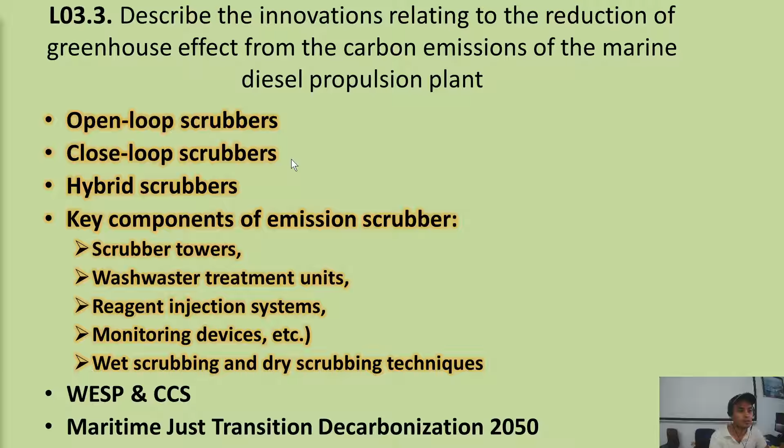So this will be our learning outcome: describe the innovations relating to the reduction of greenhouse effect from the carbon emissions of the marine diesel propulsion plant. So we will be discussing scrubbers, WESP, CCS, and Maritime Just Transition Decarbonization 2050, and other innovations relating to the reduction of greenhouse effect.

Okay, let's start. Keep calm, engineers will save the world. Are you superheroes? Maybe.

Recap on our previous discussion: we discussed energy and efficiency innovations for diesel engines. So we will be focusing more on the exhaust system and the fuel system.

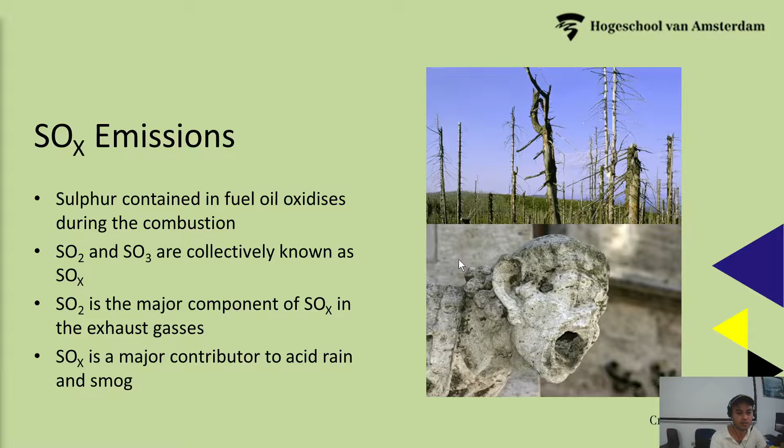SOx emissions: sulfur contained in fuel oil oxidizes during combustion. This is the effect of sulfur emission. SO2 or SO3 are collectively known as SOx. Sulfur dioxide is the major component of SOx in the exhaust gases. SOx is a major contributor to acid rain and smog. This is the effect of the acid rain.

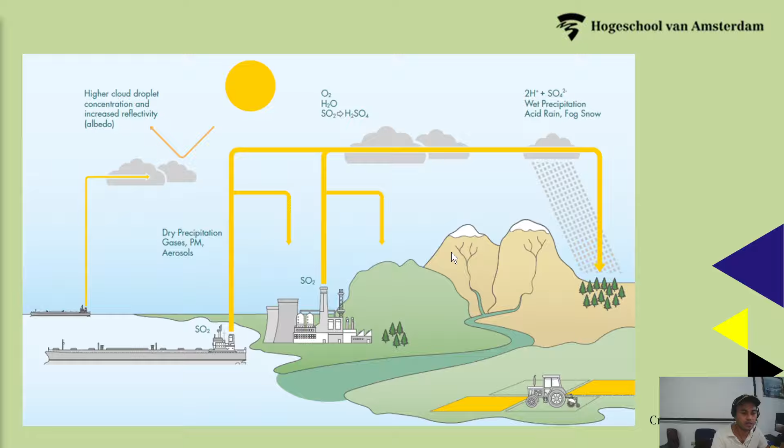So our ships have emissions, and these emissions create this reaction: oxygen gas plus water plus sulfur dioxide equals sulfuric acid. These sulfuric acids can affect our plants, our environment, our crops—there are many effects. So SOx is another one of the problems from our emissions.

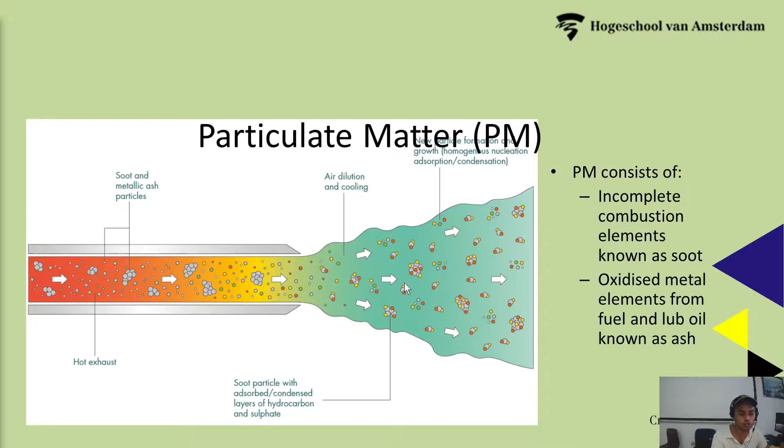This is the chemical itself. And another one we have is carbon, or black carbon, which is a form of ultrafine particulate matter.

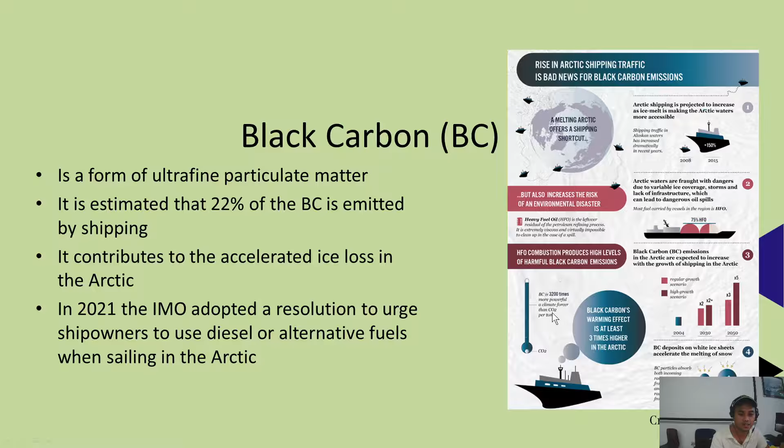Black carbon's warming effect is at least 3 times higher in the Arctic Ocean. Black carbon is 3,200 times more powerful a climate forcer than carbon dioxide per ton.

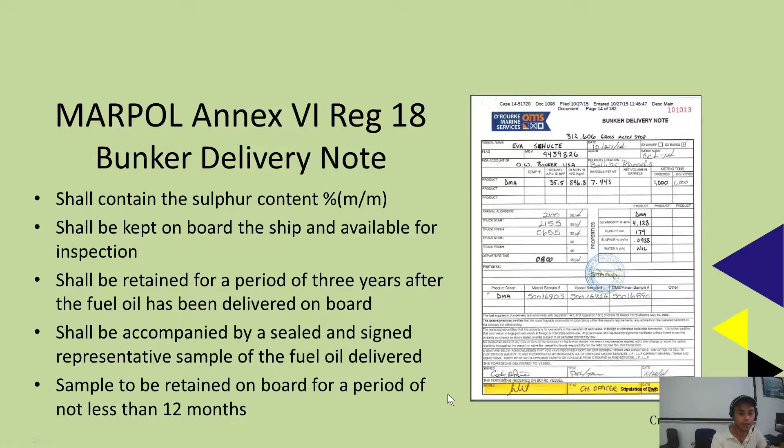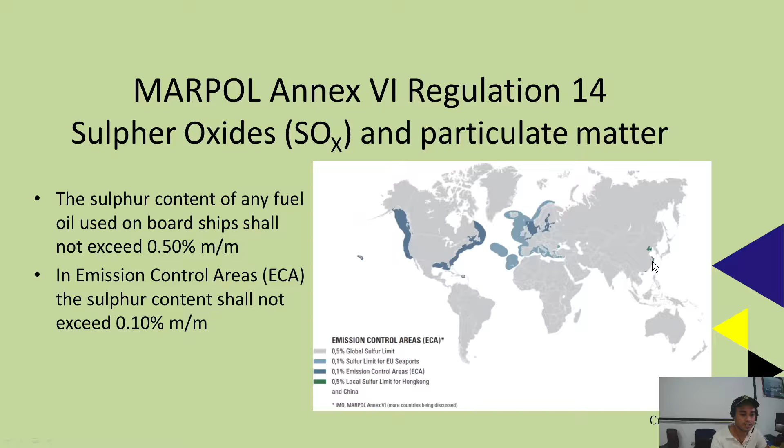So these are the ECA areas. We have them in the EU, Hong Kong and China, and also in America—they have ECA areas there.

Regulation 14.6, changeover procedure when entering or leaving SECA areas: in case a vessel has different fuel oils to comply with emission standards, there shall be written procedures on how fuel oil changeover should be carried out. The changeover should allow sufficient time for the fuel oil service system to be fully flushed before entering SECA. So if you will be entering a SECA area, 1 to 2 hours before, you must start changing your fuel to be compliant with the SOx regulation in that SECA area.

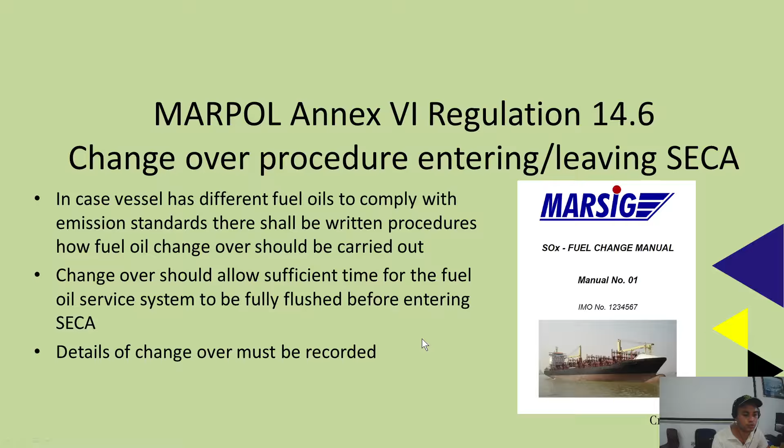Details of the changeover must be recorded, so you should have a record of it because the inspectors will look for it. We have the Marine Fuel Sulfur Record Book.

So you put the SECA area, like for example North Sea, date and time of entry into SECA, date and time changeover completed, position of ship at which changeover is completed. So you will call the bridge for the latitude and longitude of the position, volume of low sulfur fuel remaining per tank, and the signature of the chief engineer and signature of the master with the date.

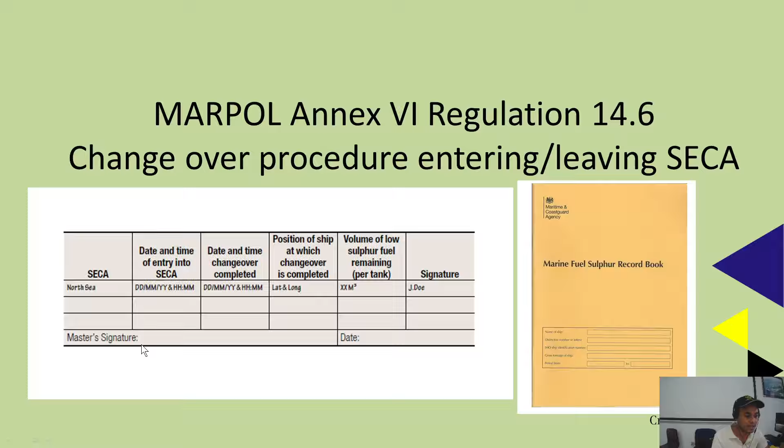So fuel oil tank management. SOLAS chapter 2-1 regulation 26 paragraph 11 requires that for each fuel type there shall be 2 service tanks with a capacity of at least 8 hours for operating main engine at maximum continuous rating and normal electric load at sea. These are for ships constructed since 1st July 1998.

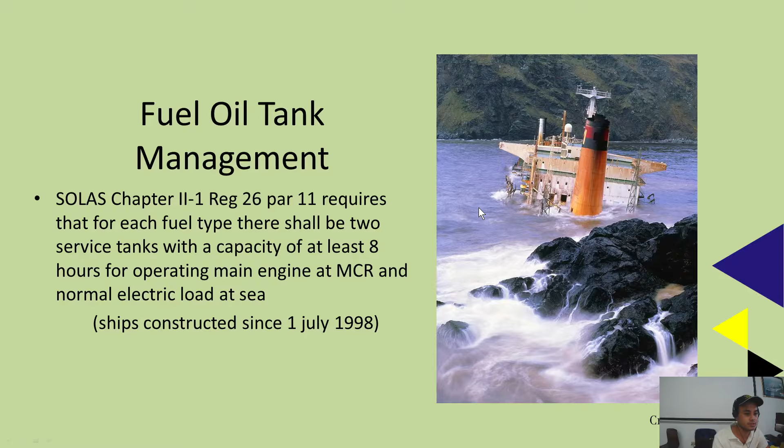So 2 different service tanks for different types of fuel. For example, we have here HFO service tank 1, capacity at least 8 hours, service tank 2, and diesel oil tank. Or you have HFO service tank and MDO service tank. This MDO you will be using on SECA areas.

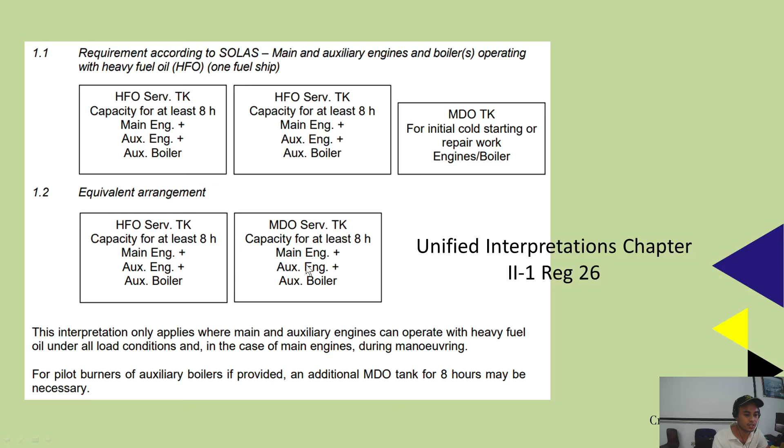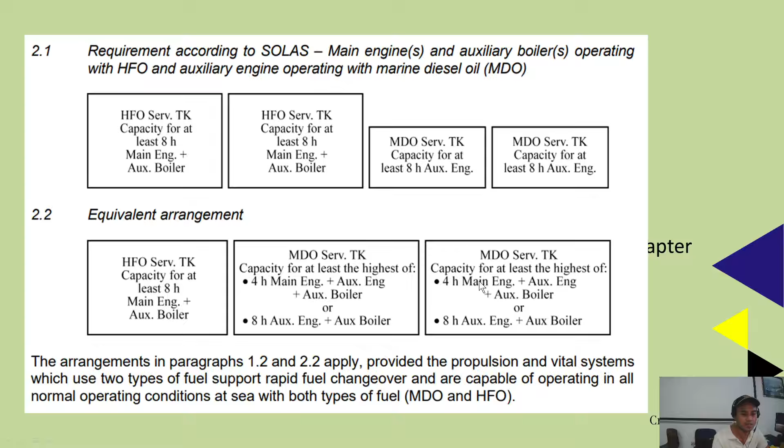Another configuration: 2 types of HFO, 2 types of DO service tank, or 1 HFO, 1 MD, and 2 diesel oil service tank. Then if you total this DO service tank, 4 hours plus 4 hours equals to 8 hours. Or you can do minimum 8 hours both, so you can also do 8 hours each tank. So this is another.

We have HFO bunker tank, DO bunker tank, and gas oil bunker tank. So 3 different bunker tanks for 3 different types of fuel. We have to transfer it to a settling tank. So separate settling tanks for different types of fuel, and then purifier for different types of fuel, and a service tank, 1 or 2.

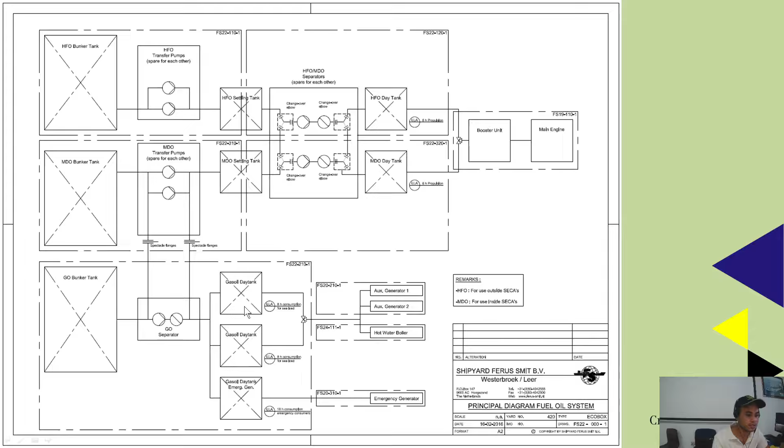Let's say 8 hours of use. Usually the gas oil day tank is already clean, so they don't usually put it on a settling tank anymore. So you can also use this.

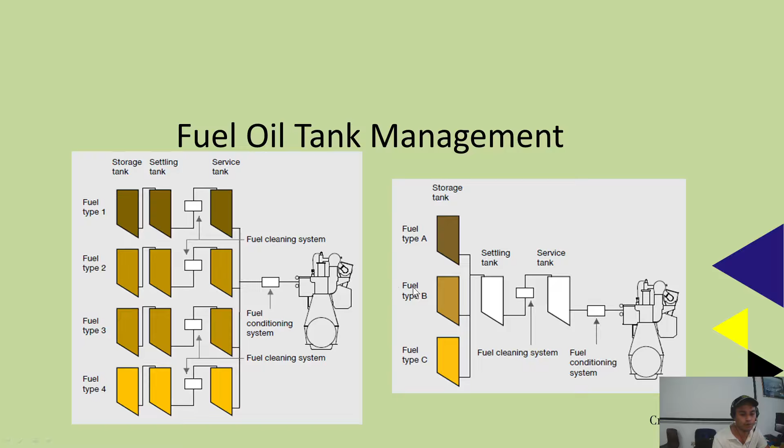Or you can have this one, fuel type A, B, C, but this is not really used on board. We usually have separate settling tanks for different types of fuel, especially if you have HFO and other much cleaner oil. You cannot mix them. Okay, changeover procedure.

So depending on fuel oil tank management, calculation needs to be made for time needed to complete changeover procedure. For example, if you have the version 3.0, if you have HFO in the settling tank at start of changeover, 0 tons, start change of 10 tons, so you will have rate of fuel consumption of 1.33 tons per hour. You will have to click on the yellow box and select required sulfur, it's 1.5.

Changeover time for compliance is 22.4 hours. So this will be your changeover time for compliance. 22 hours before entering a SECA area, or this is just an example, 22.4 hours before entering the SECA areas. So you should be done changing over your fuel.

So depending on fuel oil tank management, calculation needs to be made for time needed to complete changeover procedure. If settling and day tank needs to be cleaned, this may take days. Drain settling tank and fill up with LSFO and let it rest for 2 days before operating purifier. Flow-through method may be used to clean day tank. Pump 3 times the capacity of LSFO into a day tank to get exchange rate with HSFO of more than 95%.

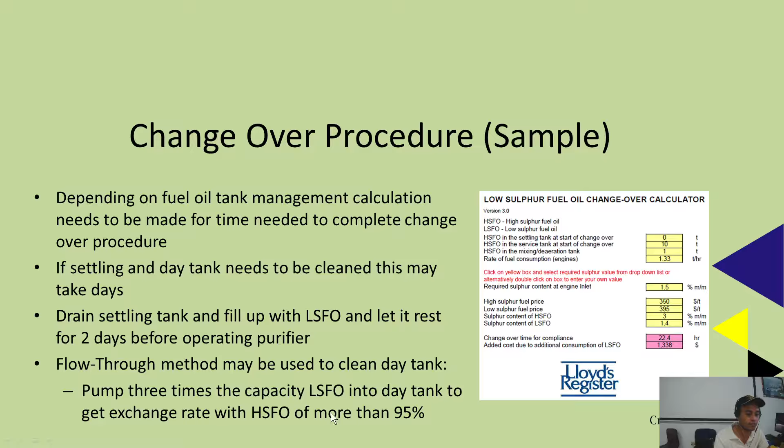Changeover procedure: changeover from high viscosity fuel to low viscosity fuel means lowering the temperature. So injection equipment needs protection against rapid temperature changes to avoid gassing of fuel, which may cause loss of power. We have discussed this one, that if there is air or gas that enters into our fuel injection system, since air is compressible, our injection might not be activated anymore because of the gas, and it may cause loss of power or stopping of the engine.

The changeover should be carried out at low load, 25 to 40% of the maximum continuous rating. The fuel temperature gradient should not exceed 2 degrees Celsius per minute. So if you have from 125 degrees Celsius down to 30, or let's say 25 degrees Celsius, so you have 100 degrees Celsius difference.

That 100 degrees Celsius, changeover procedure for that is minimum 50 minutes. But usually it takes an hour or more to change over from HFO to a lower viscosity or to diesel oil, for example.

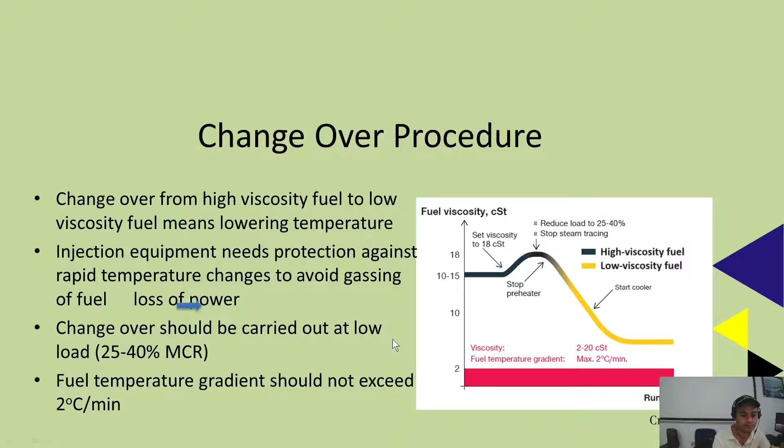So changeover from low viscosity fuel to high viscosity fuel means increasing the temperature. If you change from low viscosity to high viscosity, you have to increase temperature.

Extra care should be taken as warm fuel will flow to cold components. The material will expand slightly. The fuel pump plunger will warm up first as the barrel contains more material. With decrease in clearance, the risk of seizure increases.

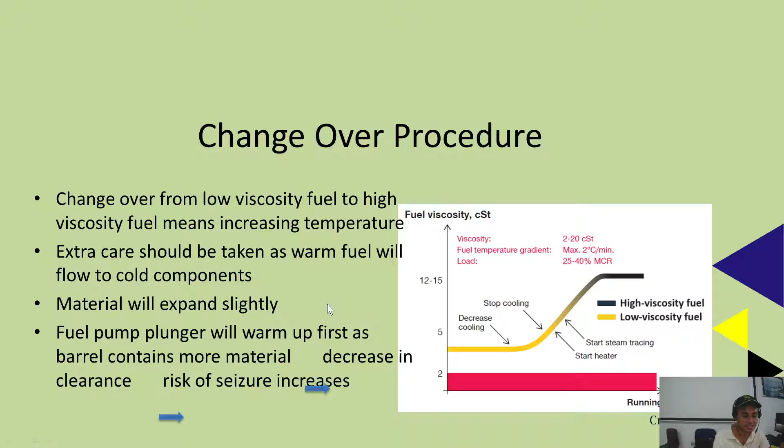When we usually change over from low temperature fuel to high temperature fuel, if you don't change over gradually, there will be a sudden temperature rise, and then the material will expand, and leakages will happen into the pumps, fuel pumps, and other connections, or if there are gaskets, there will be leakages. So be careful.

Okay, HFO MDO changing valves we have here. This is an automatic changing valve. This one is the HFO and the MDO. So if you activate this one, you put air in this valve control box, air pressure 6 bar, so this valve will move the two valves. It will change valve 1 from DO to HFO, and this will be the inlet to the engine.

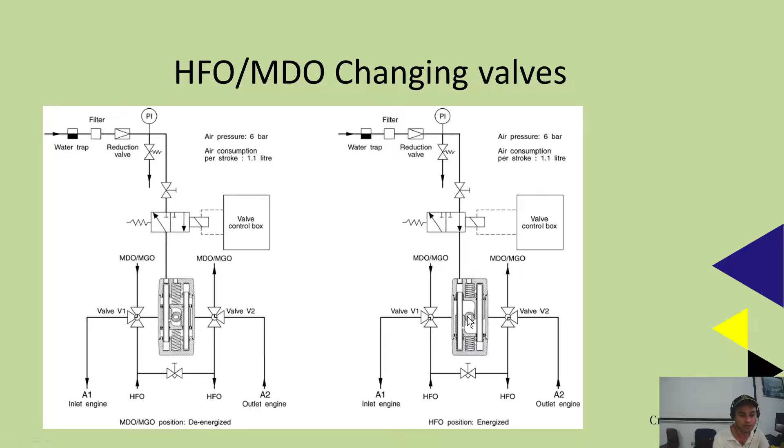So you can use, if you have two engines, like the main engine, the inlet and the outlet will both be activated in changing over. It's not possible that you have HFO inlet and then the outlet will be DO, because your HFO will contaminate the DO tank. But from DO to HFO, it doesn't hurt much, though diesel oil is much more expensive than HFO, so price will matter also. This is automatic changeover, and usually they make the changeover take about an hour, or depending on the program, depending on how long it takes to change over from one fuel to another.

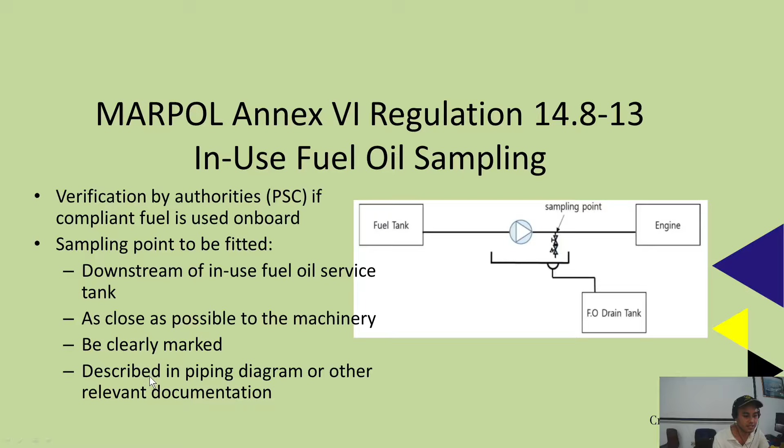MARPOL Annex 6 Regulation 14.8 to 13, in-use fuel oil sampling. We have the fuel tank, fuel sampling point here, and going to the engine. If you want a sample of your fuel going to the engine, you can get a sample from here, for verification by authorities if compliant fuel is used on board. So the authorities can get a sample here. The sampling point is to be fitted downstream of the in-use fuel oil service tank, as close as possible to the machinery, clearly marked and described in the piping diagram or other relevant documentation.

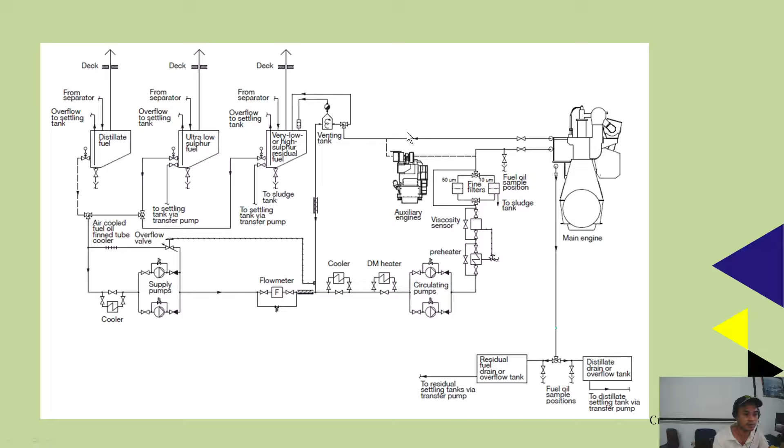So here we have the engine, and here the sample fuel oil sample points. You can get a sample for the residual fuel or the distillate, the cleaner fuel. Residual is more on the HFO side. So from the tank, service tank, to a supply pump, circulating pump, going to the engine. Also we have the generator, again getting back to the venting tank or mixing tank with the recirculation, the recirculating pumps.

MARPOL Annex 6 Regulation 4, equivalence: ships may be fitted with equipment, alternative fuels, or compliance methods used as an alternative, which are at least as effective in terms of emission reduction as required by Annex 6, including Regulation 13 and 14.

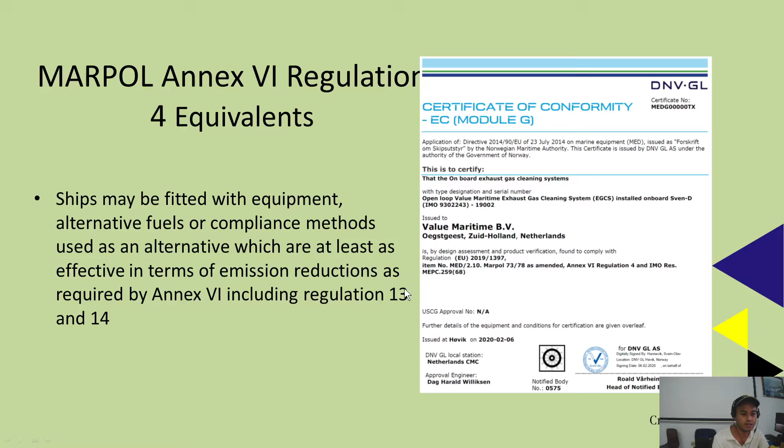So here they have an open loop exhaust gas cleaning system. This might be a scrubber, an open loop scrubber. Exhaust gas cleaning systems convert from sulfur content fuel to SOx emissions in exhaust gases. SOx emissions are derived from the sulfur content of the fuel, similar to carbon dioxide emissions. The SOx to CO2 ratio gives a clear measure of the sulfur content of the fuel.

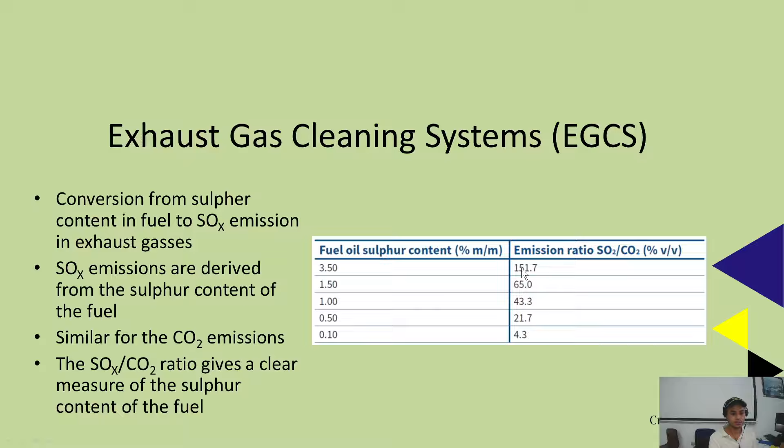So treatment processes for SOx: systems can be divided into wet exhaust gas cleaning systems or dry exhaust gas cleaning systems. For the wet exhaust gas cleaning system, we have the open loop scrubber, closed loop scrubber, and hybrid scrubber, which is a combination of the two. We'll discuss these one by one. And we have the dry exhaust gas cleaning system, another alternative, which is not usually commonly used on ships.

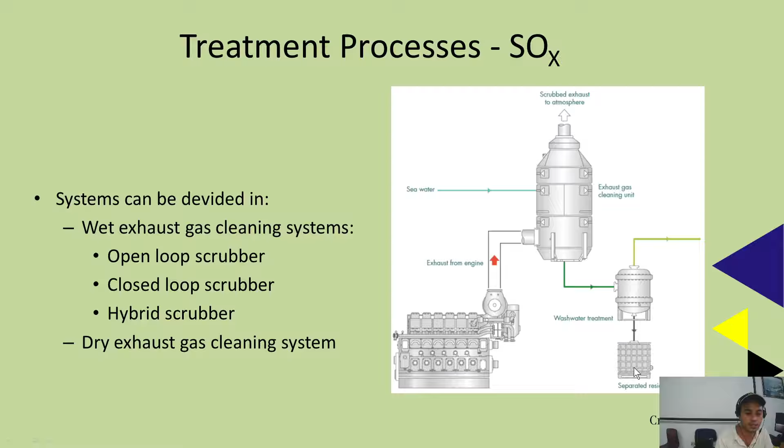So this is the scrubber system. Exhaust from the engine goes through a scrubber, and when the smoke goes up, there is a shower-like exhaust gas cleaning unit here. Seawater is showered in here, and then the wash water goes to a wash water treatment, where you separate the residue, and then the seawater can be put back to the sea.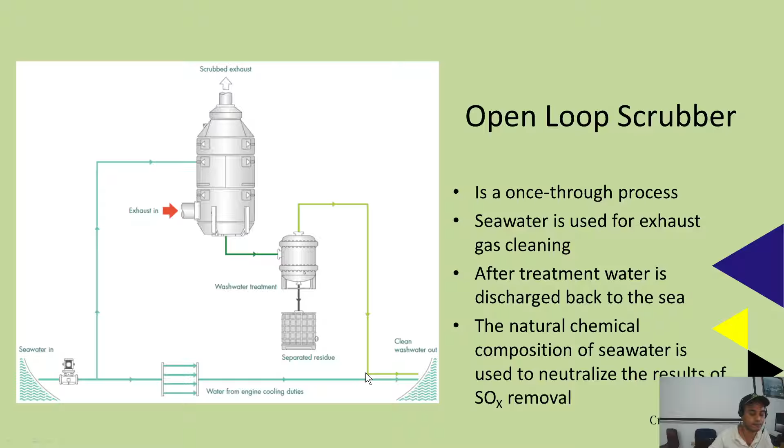Also, you can use another seawater line for engine cooling duties if you use seawater. But some ships usually use fresh water. So this is the open loop scrubber.

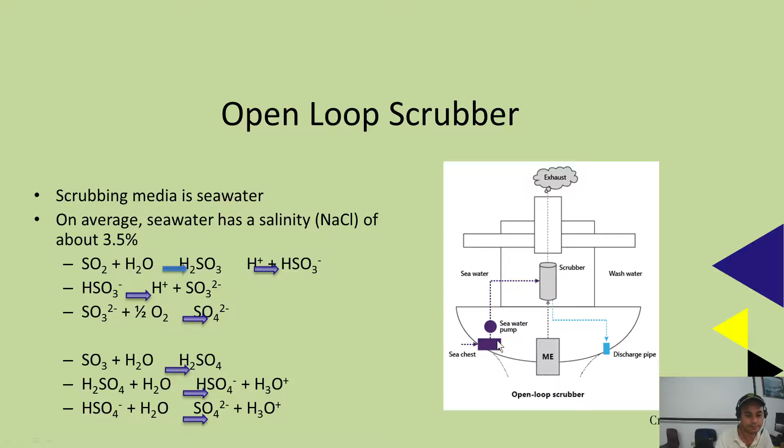Scrubbing media is seawater. On average, seawater has a salinity of about 3.5%. The combination of sulfur dioxide plus H2O equals H2SO3, which becomes H plus HSO3 minus. Usually you have sulfuric acid, which leaches in the scrubber and then goes to the discharge pipe.

Okay, how about for the closed loop scrubber? For the closed loop scrubber, fresh water treated with an alkaline chemical, sodium hydroxide, is used for exhaust gas cleaning. The majority of wash water is recirculated, and a small quantity of wash water is bled off to a treatment plant before discharge to the sea.

So let's go through how this works. We have here a pump, and the process tank, in which you get the fresh water. Then we have a chemical dosing pump that adds chemical to the fresh water. It goes to a cooler since the water in here is slightly hot.

It's pumped up to the scrubber and sprayed on top of the scrubber, then exhaust gas comes in and scrubbed exhaust gas goes out. Then the processed water goes to a process tank, and then you clean it.

The clean water you can recirculate and use back in the scrubber, and the dirty one goes to a separator or purifier, whatever they usually use. The residue will go to a tank, while the fresh water or clean water will go to a holding tank.

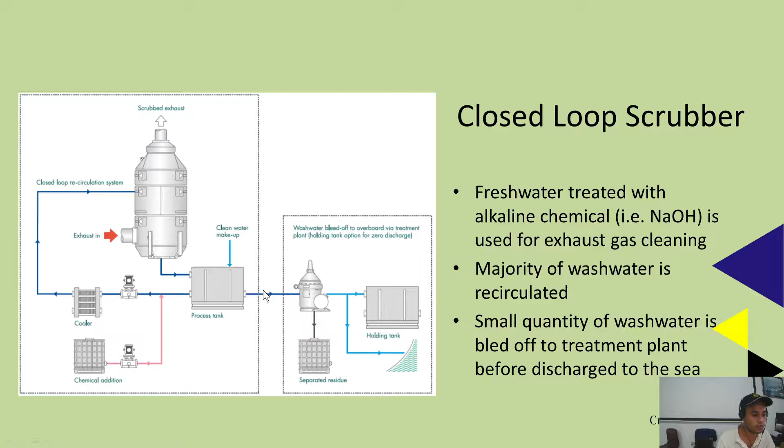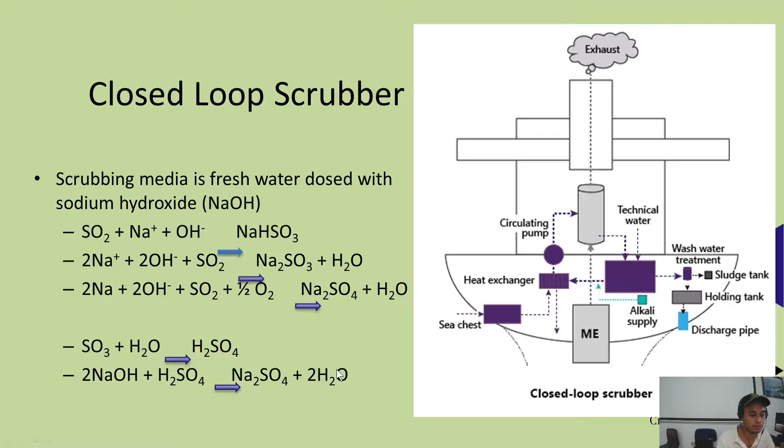We use this chemical addition to neutralize the acidity of the processed water, using sodium hydroxide. In theory, in the chemical process, we have SO2 plus sodium plus OH, because this is from sodium hydroxide, and then you get the output product, sodium... whatever it's called. Then you have the sodium sulfate and water as the result.

So for the hybrid scrubber, we have the combination of both open loop operation and closed loop operation. If you want to use open loop operation when you are at sea, you can have the open loop suction of seawater going to the scrubber and out to the sea. Then if you are in near coastal areas or shore, or going through ports, you can change over.

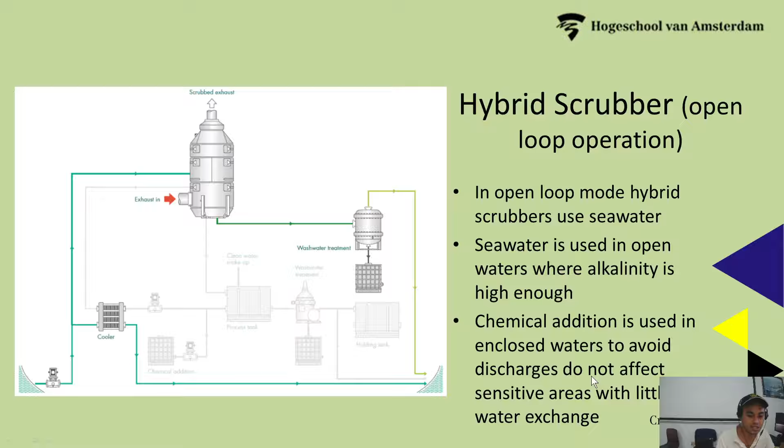Seawater is used in open waters where alkalinity is high enough. Chemical addition is used in enclosed waters to avoid discharges affecting sensitive areas with little water exchange.

If you want to use the closed loop operation, you can still use seawater to cool the cooler and then go back overboard. Meanwhile, there is fresh water, processed water with chemical, going to the scrubber and returning to the process with a separator and a holding tank. So this is the combination of the two, the hybrid scrubber.

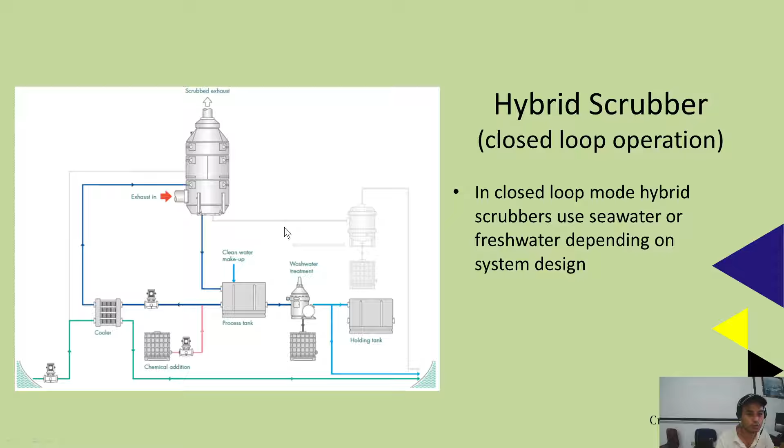In closed loop mode, hybrid scrubbers use seawater or fresh water depending on system design. So this is the hybrid scrubber - this is suction going up here and the cooler, and then going to the scrubber, and then the scrubber output goes back.

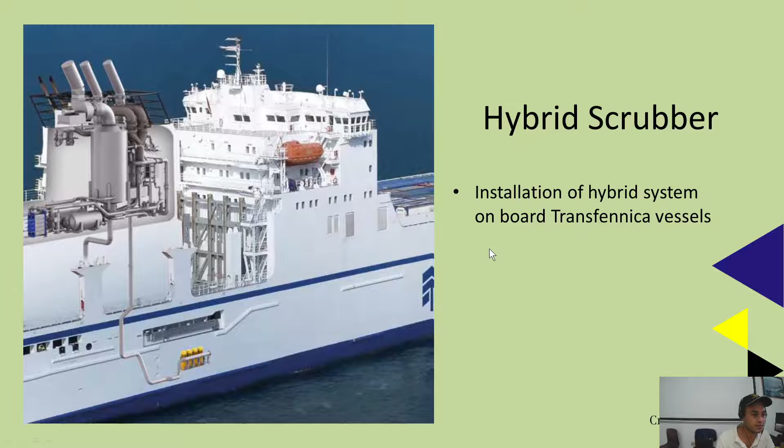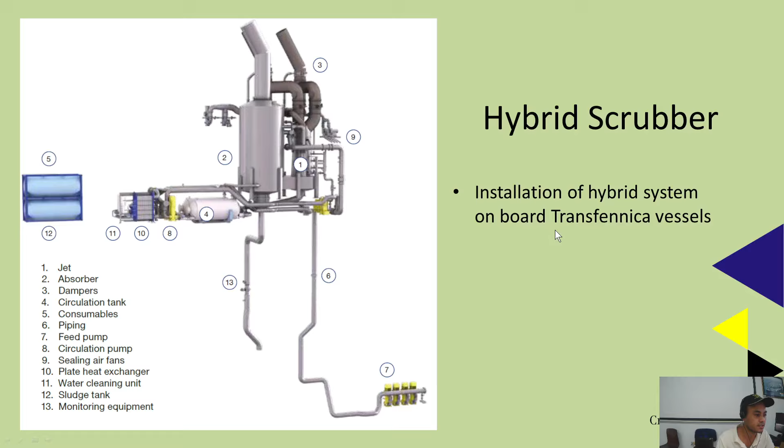Okay, so this is the Transfennica. They've used an installed scrubber in this case. So coming to this one, you can look for a scrubber system from Alfa Laval online video.

So let's talk about wash water. Most exhaust gas cleaning systems use water to remove SOx and particulate matters from the exhaust gases. So wash water should be monitored in the following parameters.

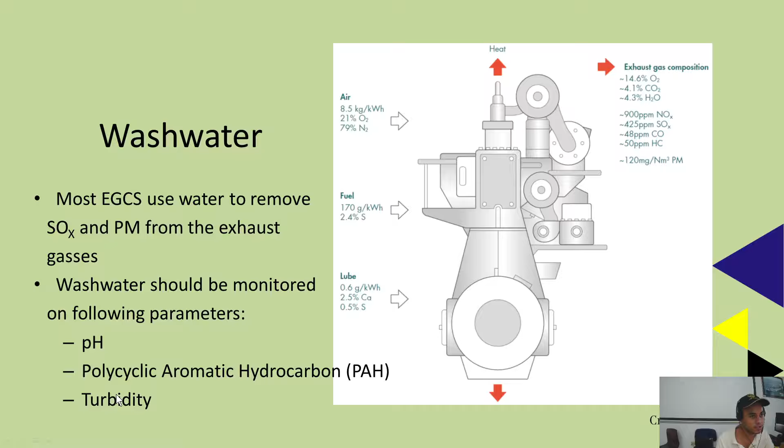So we should check the pH. It should not be too acidic for the seawater, if you want to pump it out to the sea. Polycyclic aromatic hydrocarbon, and the turbidity. It should not be turbid, it should not be dirty water. It should be clear.

Okay, monitoring instrumentation. So we have here the monitoring instrumentation: pH, PAH, and turbidity, salinity optional. You can put it here, 1, 2, and 3, and then another for number 4 here.

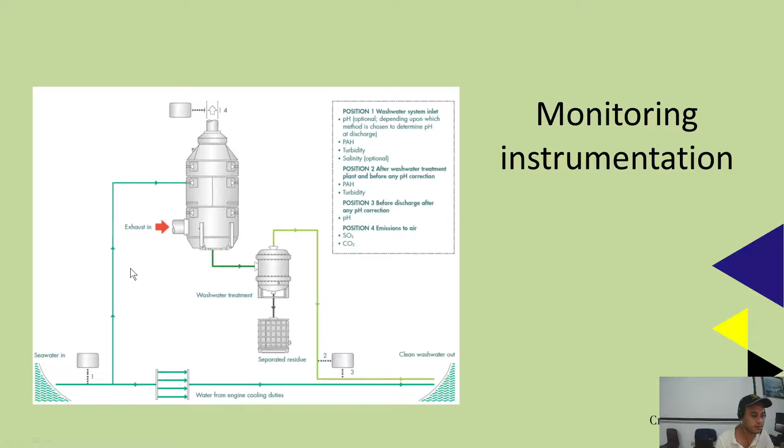So for SO2 and carbon dioxide emission, position 4. Position 3 before discharge, after any pH correction here. And then position 2 also here, PAH and turbidity. So we have also position 1, this is the inlet of the wash water system.

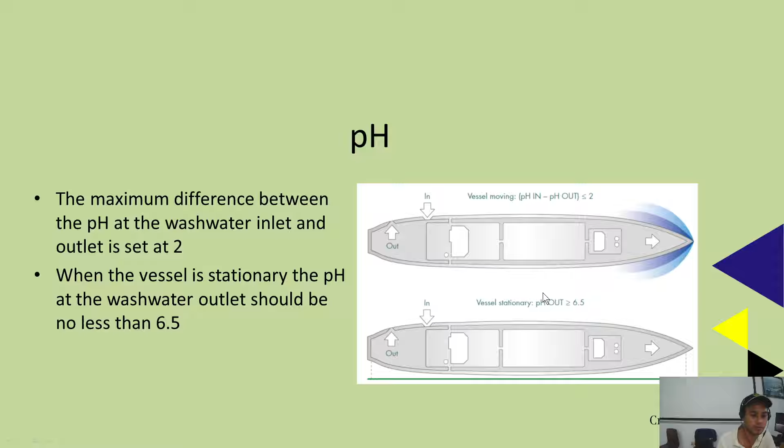So for pH, the maximum difference between the pH of the wash water inlet and outlet is set at 2. So when the vessel is stationary, the pH of the wash water outlet should be no less than 6.5. In and out, pH in and pH out is less than or equal to 2. So there should be a maximum rise of pH 2 on the right or lower down, because acidic is going down. Less than or equal. Okay.

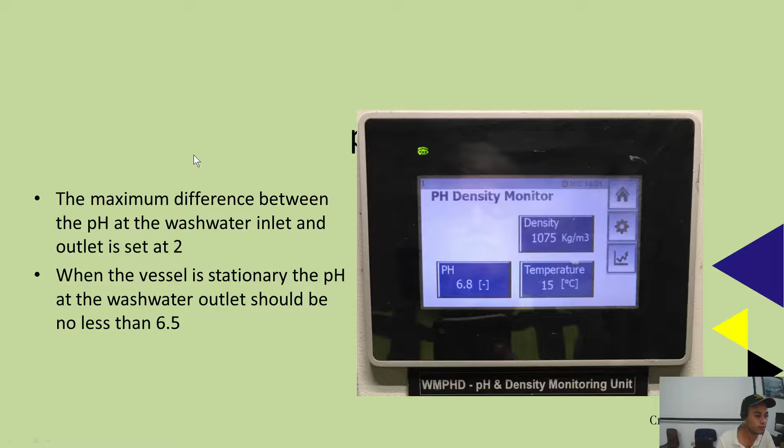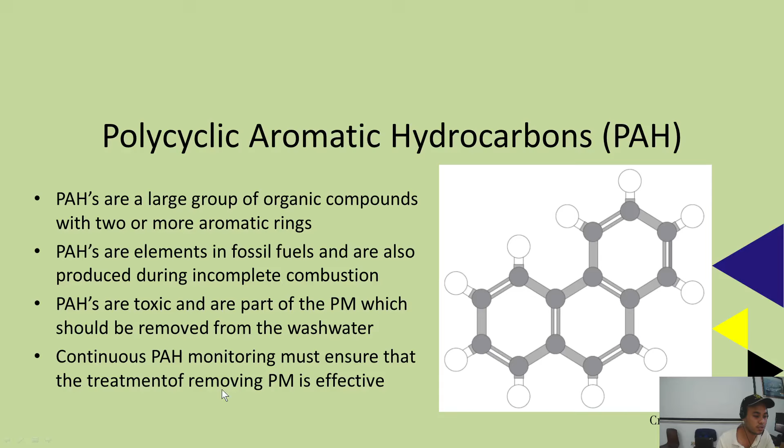Polycyclic aromatic hydrocarbon (PAH) are a large group of organic compounds with 2 or more aromatic rings or elements in fossil fuels that are also produced during incomplete combustion. So PAH are toxic and are part of the PM which should be removed from the wash water. So continuous PAH monitoring must ensure that the treatment removing PM is effective.

Okay, so we have here. So since PAH is toxic, we should remove it from the water. Turbidity is a measure of the degree to which water loses its transparency. If it's not transparent, then it's turbid. The more total suspended solids, the hazier it becomes. So combined with PAH, turbidity measurement is an effective means to monitor the removal of particulate matters from wash water. So we have a pH value in here.

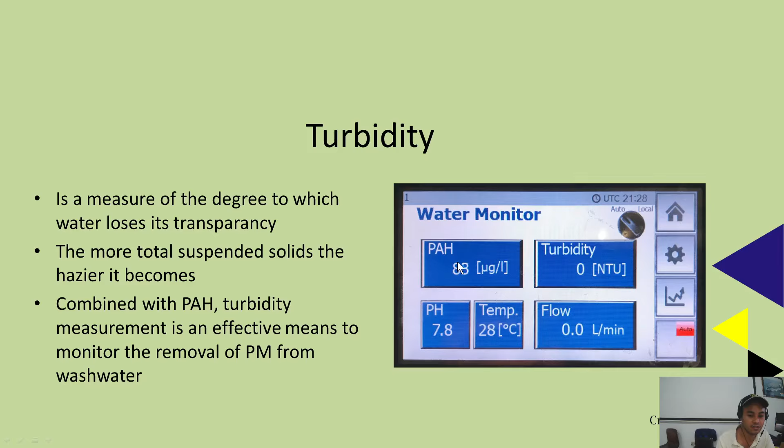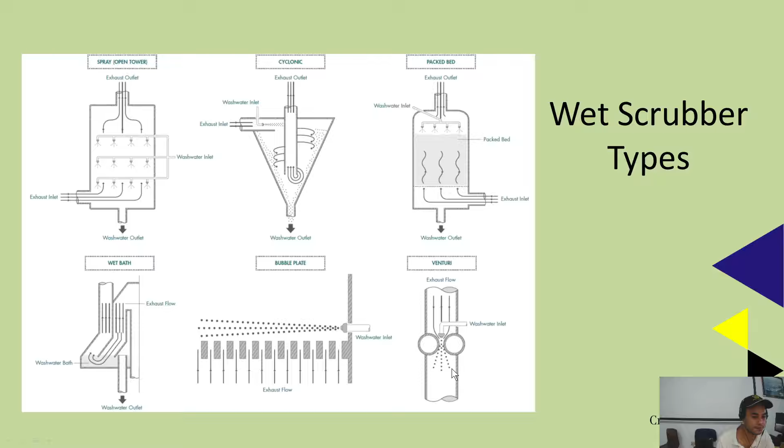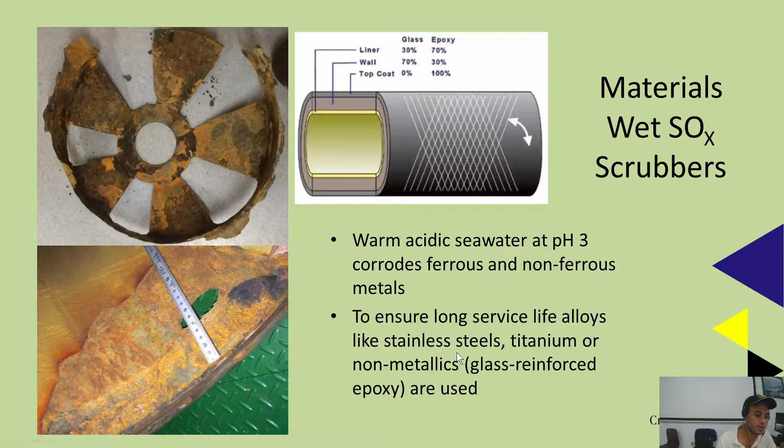But if you will not use this material, what will happen is this one will be damaged, with more corrosion.

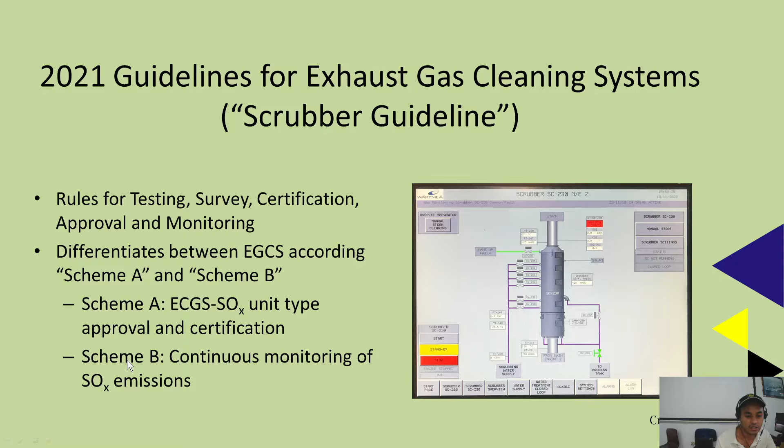Okay, on the 2021 guidelines for exhaust gas cleaning systems, scrubber guidelines, rules for testing, survey, certification, approval, and monitoring should be there. It differentiates between EGCS according to Scheme A and Scheme B. Scheme A is EGCS SOx unit type approval and certification. Scheme B is continuous monitoring of SOx emission.

So sample of Scheme B continuous monitoring SOx. So we have here our scrubbers emissions status for Wärtsilä.

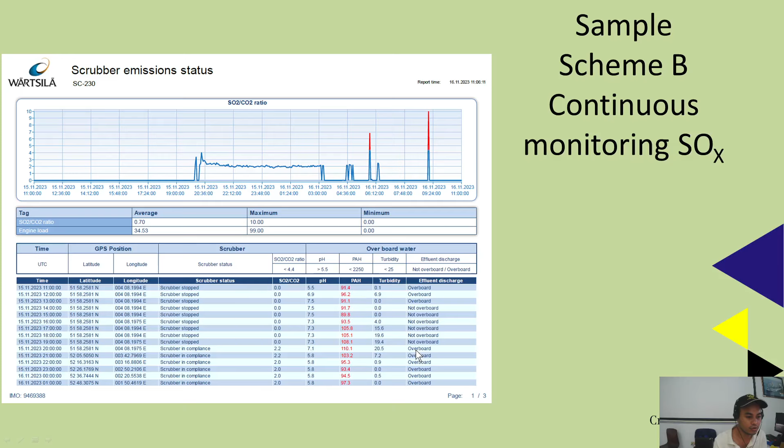So when there is an alarm for too high PAH, the scrubber will automatically stop. Effluent discharge overboard, so there is data in here that will be checked by the authority.

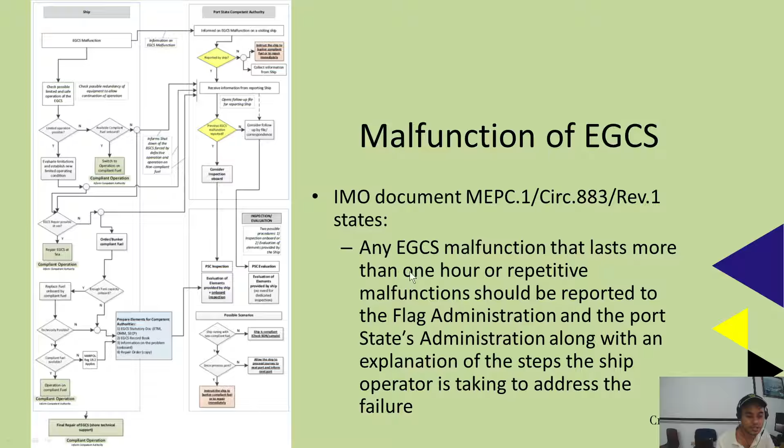Malfunction of EGCS, so we have troubleshooting for this. IMO document MEPC1 circular 883 revision 1 states any EGCS malfunction that lasts more than 1 hour, or repetitive malfunction, should be reported to the flag administration and port state administration, along with an explanation of the steps the ship operator is taking to address the failure. If there is any failure, you should report it, especially if it's more than 1 hour or repetitive.

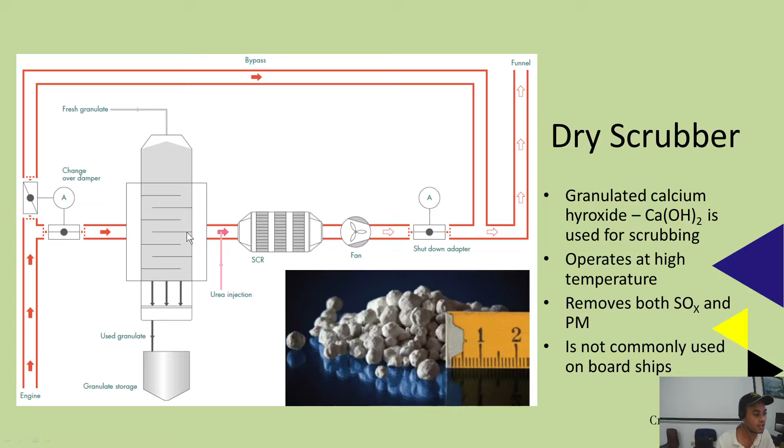Granulated calcium hydroxide is used for scrubbing, operates at high temperature, and removes both SOx and particulate matter. It's not commonly used on board ships because this is usually used in industries, land industries, or big industries on land. So this is the dry scrubber.

It goes to an SCR, still they will use SCR. And then this one is the granulate.

There is also a ban on the use of open loop scrubbers. Since the introduction of open loop scrubbers, more and more coastal states and ports worldwide are banning the use of these scrubbers. UNCLOS articles are used to support this claim, banning open loop scrubbers near coastal states or ports. That's why we have to convert to closed loop operation, and that's why hybrid scrubbers are most common nowadays.

Turning an air pollution problem, SOx, into an ocean pollution problem. This PAH, the SOx, iron, chromium, mercury, nickel, cadmium, zinc, vanadium goes into the sea as wastewater. That's why they're banning the use of open loop scrubbers.

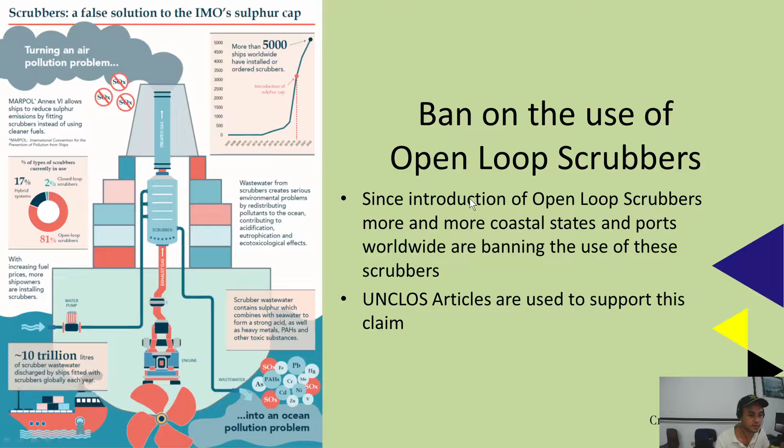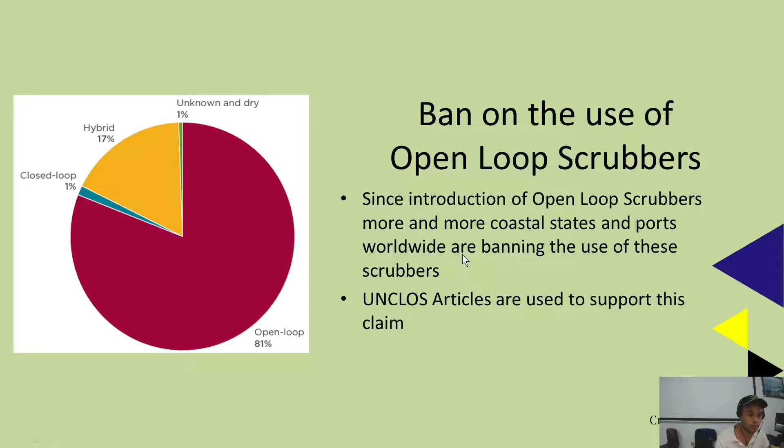Nowadays open loop scrubbers are 81% used on board ships, so now they are converting to hybrid. Since the introduction of open loop scrubbers, more and more coastal states and ports worldwide are banning their use. UNCLOS articles are used to support this claim.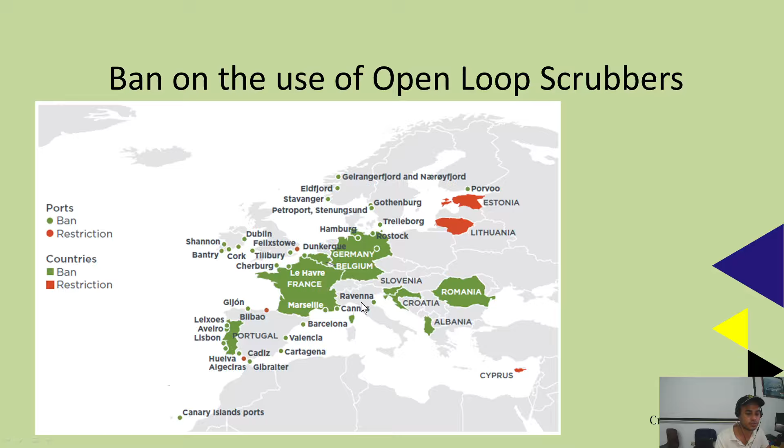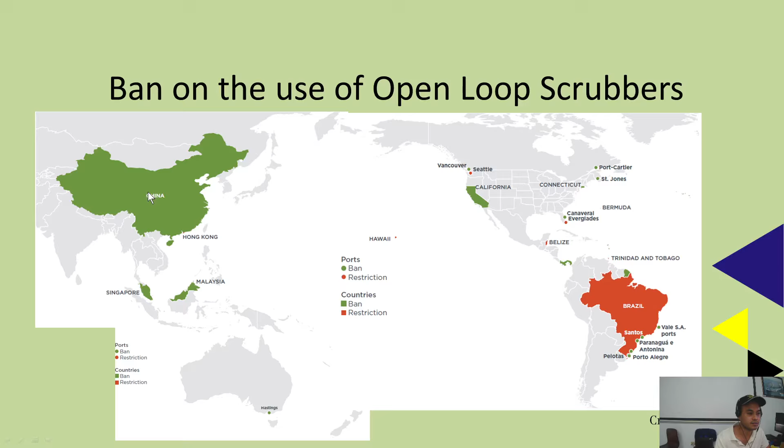We have bans and restrictions in the EU, including France, Germany, Romania, and other parts. Also Egypt, Turkey, Saudi, Kenya, Mozambique, Nakala, Ghana, Cote d'Ivoire, Brazil, China, and Malaysia.

Evidence that sulfur regulation reduced air pollution from shipping, from a NASA study: less sulfur emissions means fewer aerosol particles released to form detectable ship tracks. Lowering the sulfur content has weakened the masking effect, effectively boosting warming of the seawater. The likely side effect of the 2020 regulations is an increase of global temperatures of around 0.05 degrees Celsius by 2050 - so is that a very small or a big improvement?

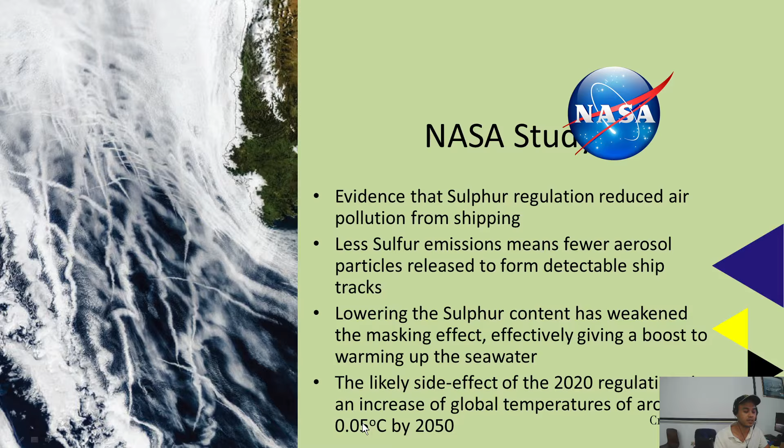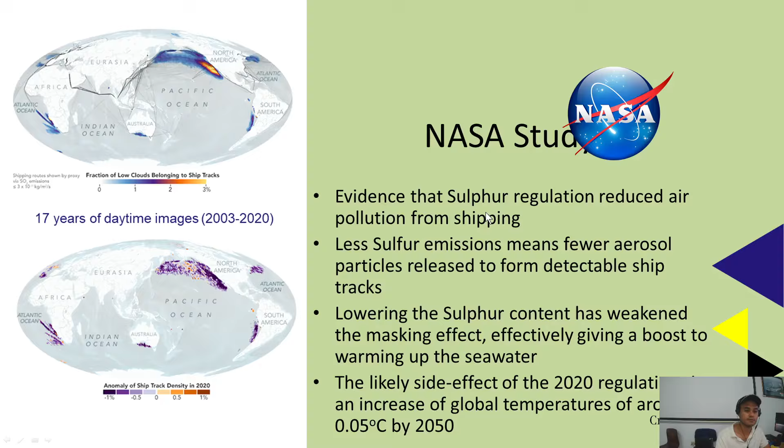More on scrubber systems - that's it for this topic. Up next, in our next video, we will be discussing NOx, or nitrogen oxides, and the innovations we've done to decrease this emission on board our ship.